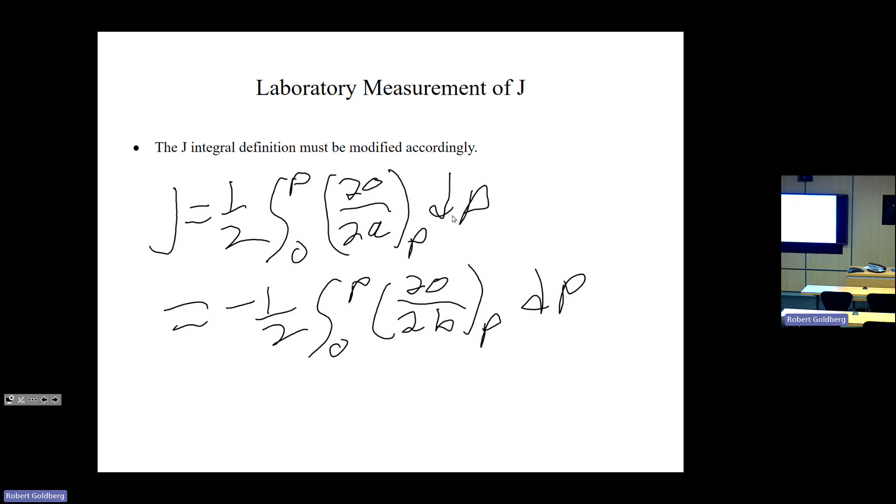And we can make the switch again because of this relationship here. So in order to compute J from this expression, we need to determine the relationship between the load and the displacement and the dimensions of our panel.

We're assuming an isotropic material that obeys the Ramberg-Osgood stress-strain law, the nonlinear elastic law we talked about last week. From dimensional analysis, you can determine that the displacement equals half the distance between your cracks times some function of the load over sigma naught - one of the constants in our Ramberg-Osgood law related to the yield stress - times B, and also a function of the crack length divided by B, and sigma naught divided by the modulus, and Poisson ratio allowing for plane stress, and the other constants in the Ramberg-Osgood law, alpha and n. So this is just some non-dimensional function relating our displacement to all this.

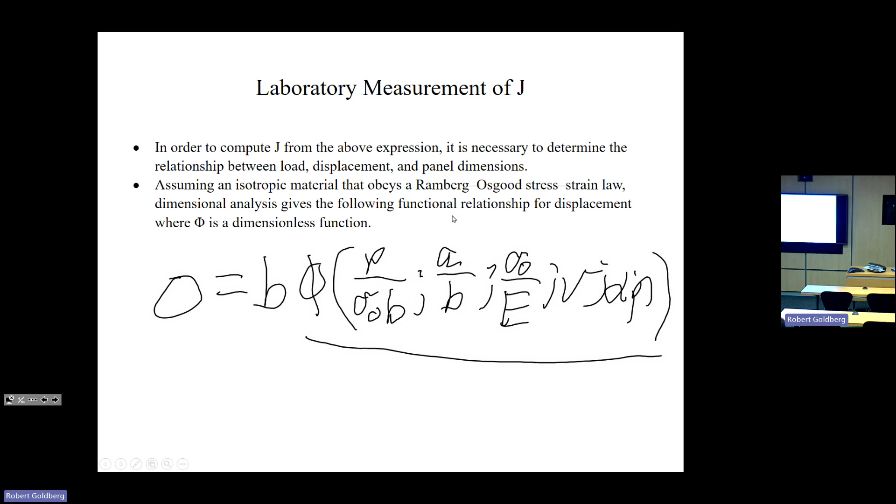Now we'll simplify things a bit: for fixed material properties that don't change with time, we only need to consider the load and specimen dimensions. You can take your displacement and break it up into an elastic component and a plastic component. If we substitute this into our expression, we'll effectively break it up into an elastic component and a plastic component.

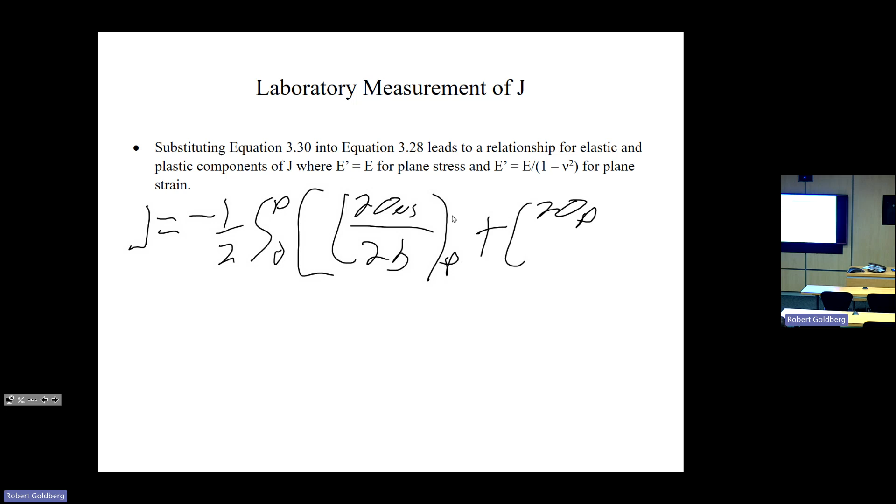Specifically, we can say that J equals -1/2 the integral from 0 to P of the derivative of the elastic part of our displacement with respect to B under load control, plus the derivative of the plastic part of the displacement with respect to B for constant load, all integrated over the load.

This elastic part is easy - we find it's just equal to the square of the stress intensity factor divided by E prime, where for plane stress, E prime is just equal to E. For plane strain, there are also Poisson ratio terms in there. Minus 1/2 the integral from 0 to P of the variation in the plastic part of the displacement with respect to B, integrated over dP.

So we only need to worry about the plastic displacements, because the solution for the elastic component of J is already available - it's the standard stuff from when we discussed linear elastic fracture mechanics. Now we can also assume that all our stresses are concentrated right in this region between the cracks, because of the crack tips.

A reasonable assumption is that the plastic deformation is confined to the ligament between the crack tips. Because of that, we can assume that B, the distance between the cracks, is the only length dimension that influences the plastic part of the displacement, since that's the only place where any notable displacement is going on.

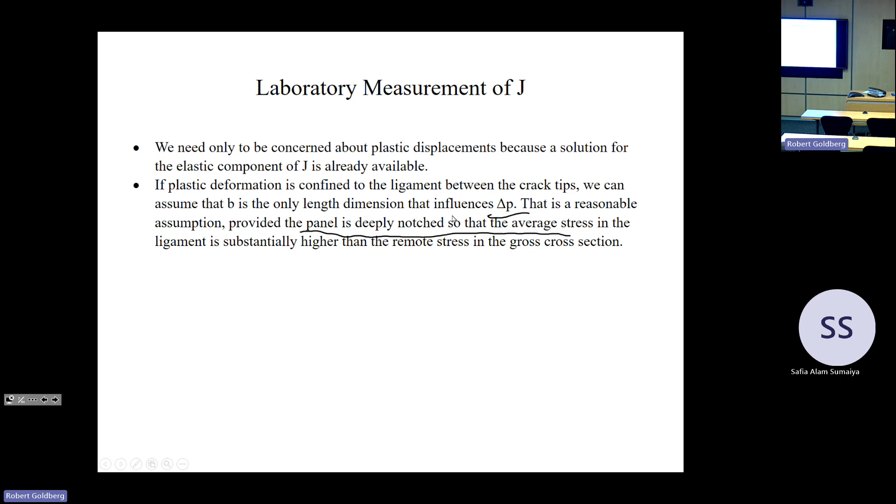So with all that, we're going to define a new function for the plastic displacement. We'll say it's equal to the distance between the cracks times some function of the load divided by this half distance between the cracks.

And we're going to assume, since plasticity is only taking place between the cracks, we don't have to worry about what's going on in the region of the crack length.

So taking a partial derivative with respect to the ligament length B, we take this expression and differentiate it. The derivative of the plastic part of the displacement with respect to B is equal to, by a chain rule type of thing, this function H of P over B, because we differentiate out the B, and then minus H prime of P over B times P over B.

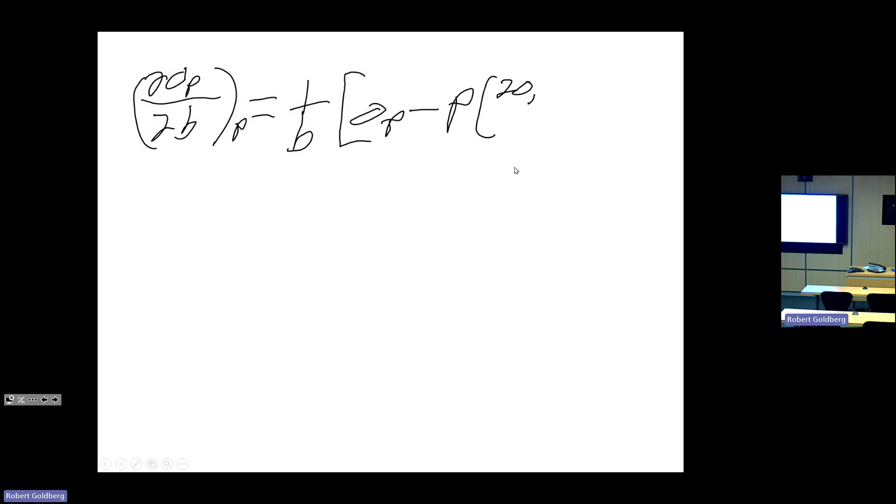And from that, when we take all this and substitute it in what we have here, using this definition that H of P over B is equal to our plastic displacement divided by B, and substitute it in, what we end up with is that the derivative of the plastic part of our displacement with respect to B, for the case of applied load, is equal to 1 over B of the plastic displacement minus P times the derivative of plastic displacement with respect to the load for the case of constant B. And yeah, that's it.

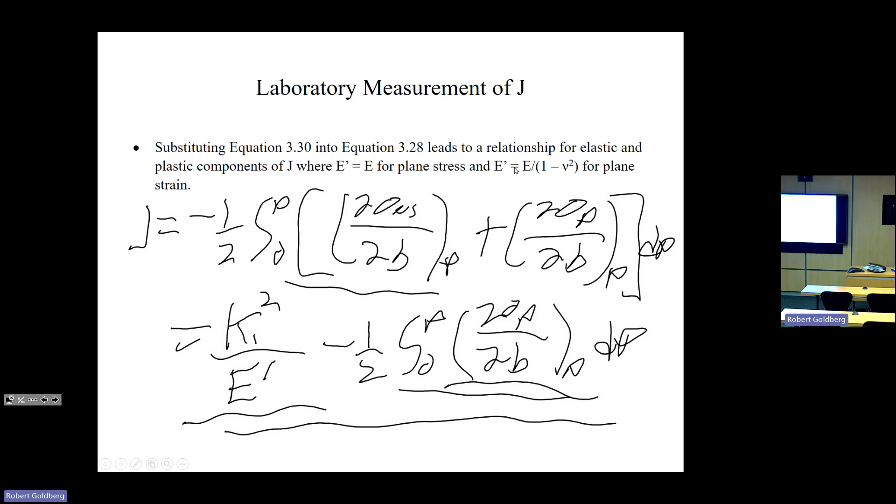Okay, so then we take this and substitute it into... here. So we take all this we found, so we can substitute it in. And what we get after all this, and doing some math, integrating by parts...

What we come up with is that J is equal to the square of the stress intensity factor divided by E prime, plus 1 over 2 times B times 2 times the integral from 0 to the plastic displacement of P times d delta P, minus P times delta P.

And, at least from a theoretical point of view, this is something that we can measure in the laboratory, because if we have our total displacement and we subtract off the elastic displacement, using some of those figures we showed last week to show how you could determine the plastic part, we had a figure where you had your stress strain curve and you could determine your plastic displacement based on your load displacement curve. So you can determine your plastic displacement at any point.

So this is ultimately an equation where, when you're doing an experiment, you measure your distance between the cracks, you measure the current value of the load, your current value of your plastic displacement, you carry out this calculation, and you can determine the value of your J integral in the laboratory. And as I said, in a couple weeks, when we go into details on laboratory testing, we'll go into these ideas in more detail and fill in some of the gaps.

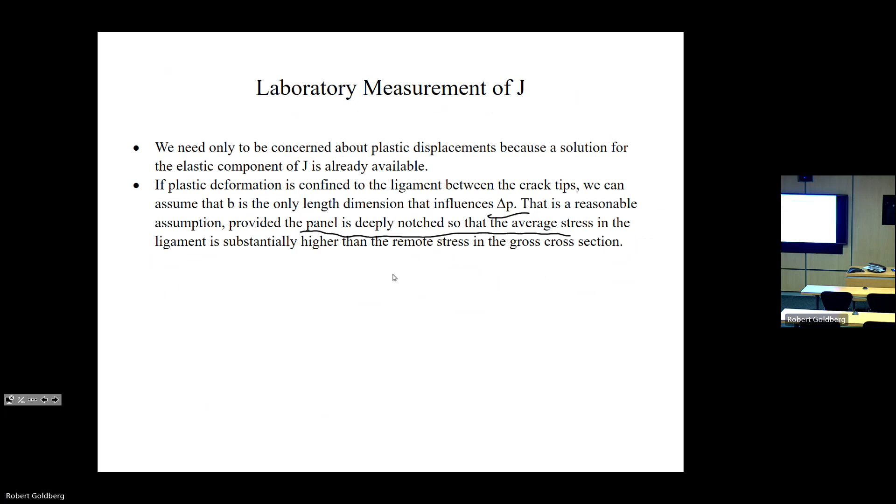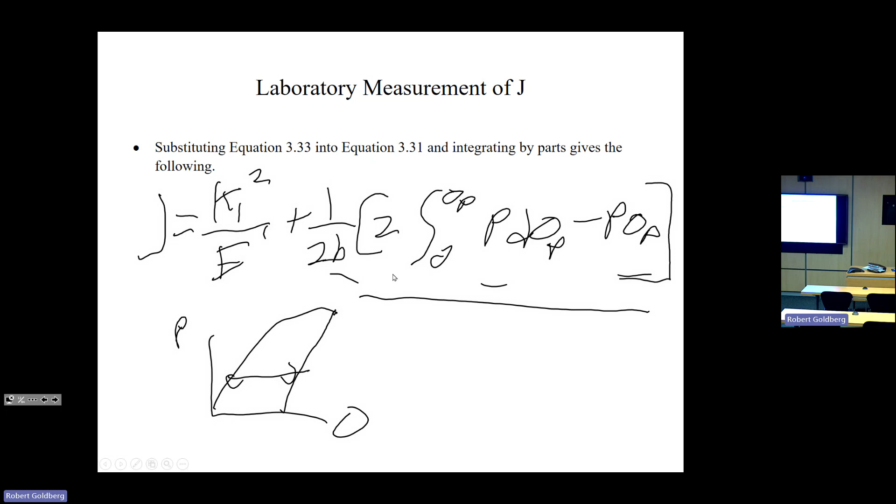But this is just an idea where, for this particular specimen geometry, the double-edged notch tension specimen, it's a way where just by measuring in the laboratory crack lengths, distances between cracks, load, and your load displacement curve, you can experimentally come up with the value of the J integral, okay?

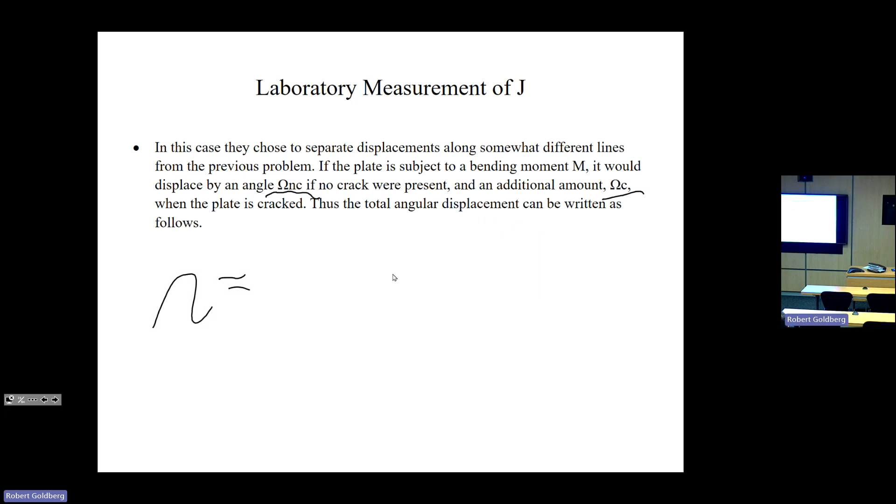So the total angular displacement, omega, defined here, is equal to the non-cracked part of the angle that would occur without any cracking, plus the change in angle due to cracking. Keep in mind, if you have a really deep crack, this change becomes really big compared to the non-cracked part, so the effect of the non-cracked part basically goes away.

So the energy absorbed by the plate is equal to the integral from 0 to the current value of the rotation angle of the moment, integrated over the angle. It's the same way that for a tension test, the strain energy is the area under a force-displacement or stress-strain curve. For this case, under bending, the energy is the area under the moment-angle curve.

So as we talked about before, J is ultimately equal to the derivative of our strain energy with respect to crack area. When we do this for this problem, only omega C, the change in angle due to cracking, contributes to the energy release rate, because omega NC is the change in angle that would take place ordinarily if there wasn't any cracking, and isn't a function of crack size by definition.

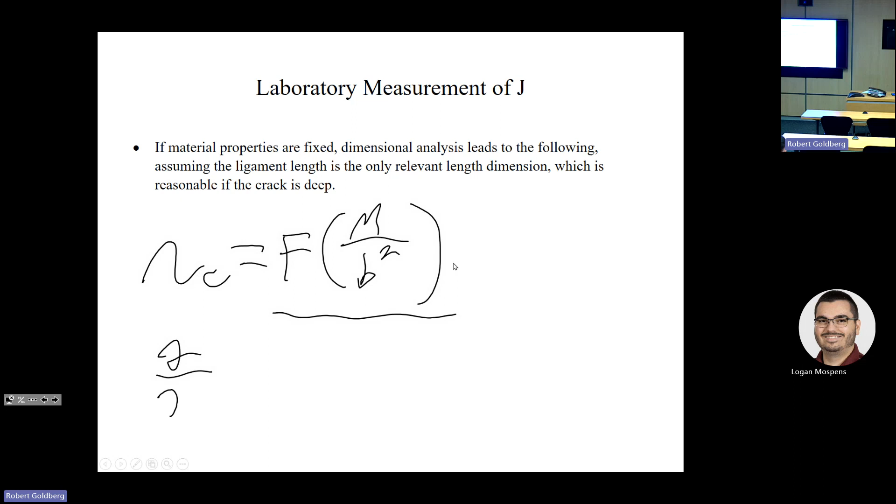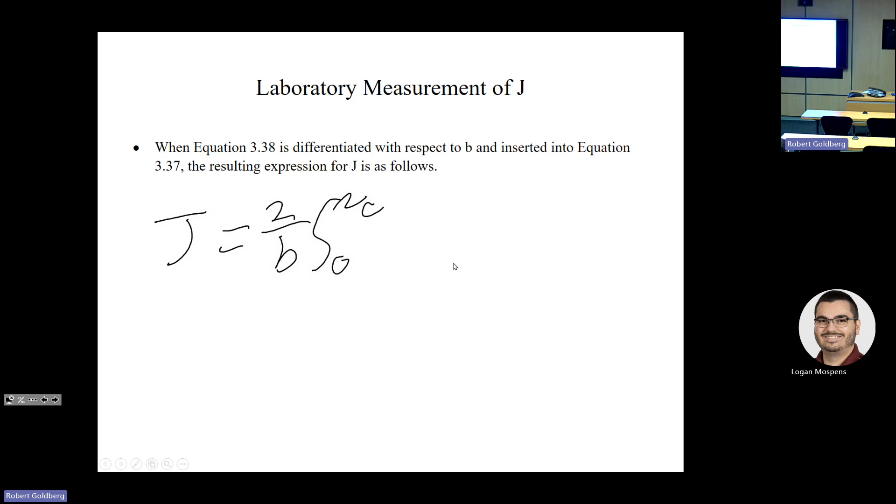So we take this and differentiate it with respect to B, and substitute it in. When we do all that, we end up with J equal to 2 over B times the integral from 0 to omega C of M d omega C.

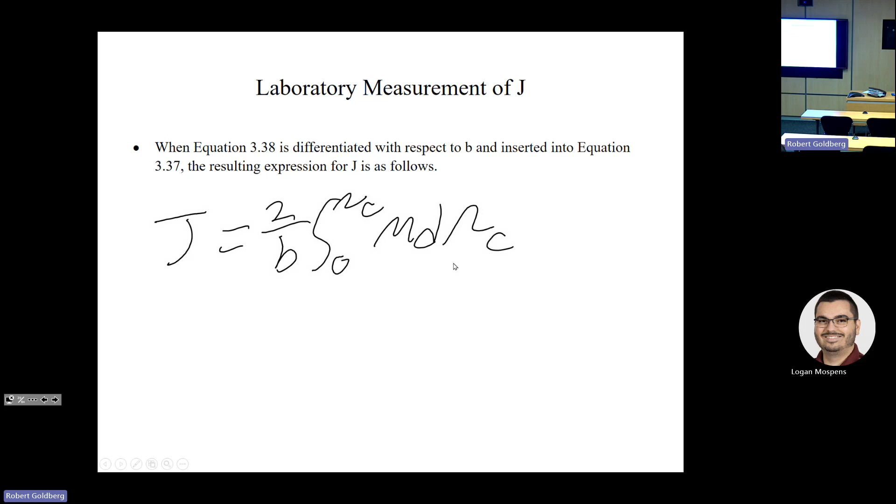Now, you can see a lot of things are falling before, like I said, you'll see in just a few minutes we're going to end up pretty close to where we were before, just formulated a little bit differently, and it'll be more in terms of energy.

Note here, the decision to separate the angle into crack and no crack components was somewhat arbitrary. Could have divided the displacement into elastic and plastic components as we did before. If the crack is relatively deep, this should be entirely elastic. This change in angle may have both elastic and plastic components.

So we can rewrite, and we can say that J is equal to 2 over B times the integral from 0 to the elastic portion of the angle change of the moment, of the elastic portion, plus the integral from 0 to the plastic part of the moment d omega p.

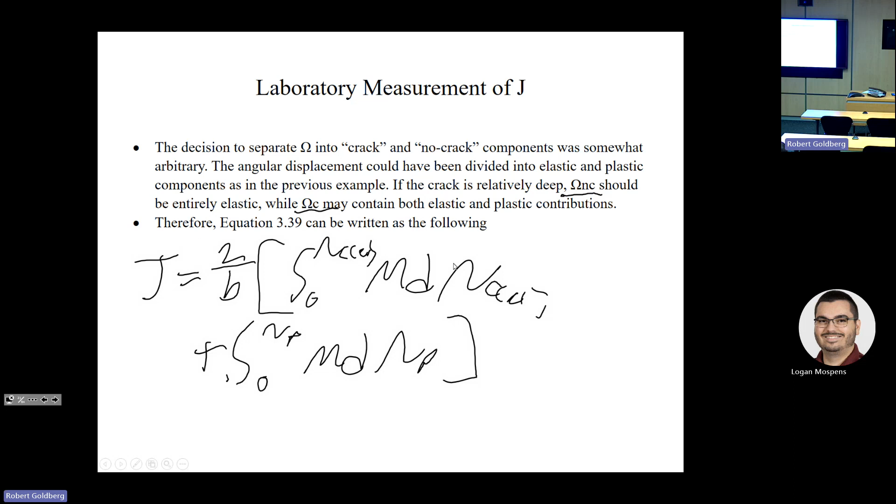And just to note, the prior analysis on the double-edged crack plate in tension could have been written in terms of displacement, if you didn't have any cracks, and added displacement because you have cracks. But we were able to get simpler functions in the previous problem because we were able to assume that the ratio of the crack length to the distance between the cracks didn't matter, and it was a reasonable assumption for our plastic displacements.

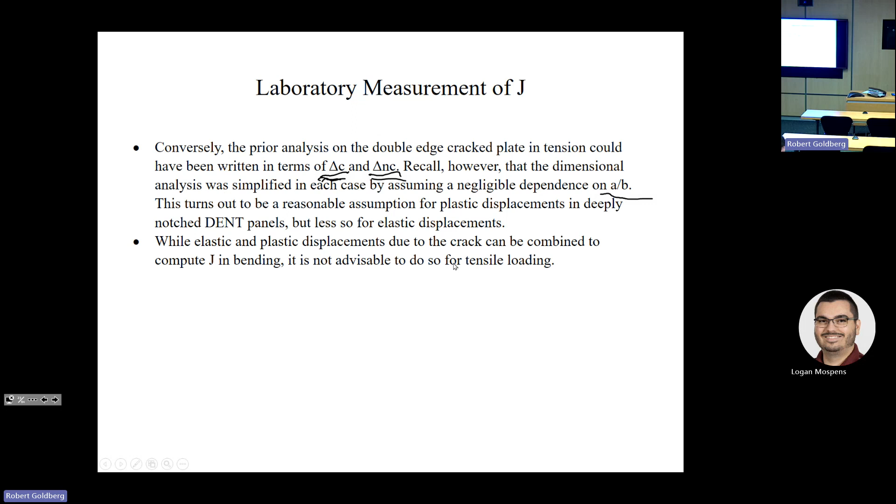So this assumption was good for the problem we looked at, but while trying to do this other idea, if we tried to do this type of idea for the problem we looked at before, it wouldn't be quite as accurate. So you can combine the elastic and plastic displacements for the J integral in bending, but it's not so good to do it in tensile loading.

So the idea that came from this Rice paper is, in general, the J integral for a variety of configurations can be determined to be some dimensionless constant times the strain energy due to cracking, divided by the thickness and whatever dimension you choose for the distance between your crack and something else of interest, whether it's the edge of another crack or the distance between the crack and the end of the plate. And remember, B is equal to thickness, because for all the other problems we looked at, we assumed a unit thickness, but we have to account for the idea that the plates we look at may not just have unit thickness.

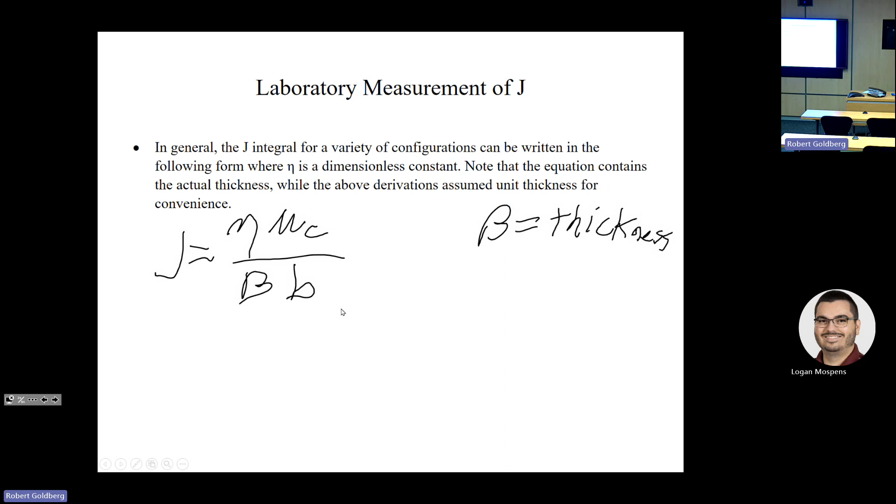So this equation expresses J as the energy absorbed divided by the net cross-sectional area. This is our net cross-sectional area times the dimensionless constant. And for our deeply cracked plate in pure bending, the problem we just looked at, this constant can be set equal to 2, which is why we got the equations we did.

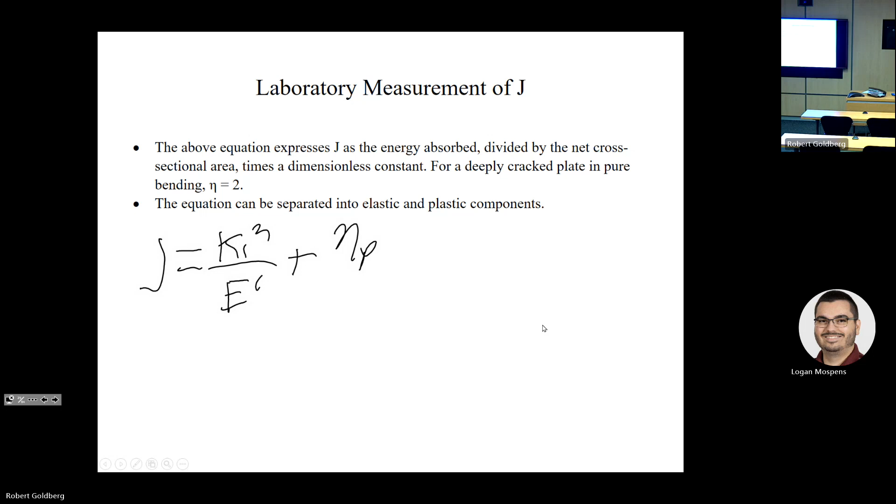And we can take this equation we just had and break it up, in general, into elastic and plastic components. So J is equal to K1 squared divided by E prime, plus this constant times the strain energy due to the plastic part of the strain energy, divided by the thickness and the B dimension.

So it's all this idea leading into the fact that if you separate out the elastic and plastic parts of things, which for some types of tests is easier than others, this is a way that from the laboratory you can take load displacement. The whole idea of all of this is that you can take load displacement curves from tests on various types of specimens. We're going to go into more detail on this when we cover more specific types of tests, but you can take load displacement curves, which is the common type of measurement in a fracture test.

And from these you can compute the J integral to define the elastic plastic response. So even though some of these derivations were a little hairy, the big picture is that you can go from load displacement curves to determining the J integral. So the J integral is something that you can determine in a laboratory.

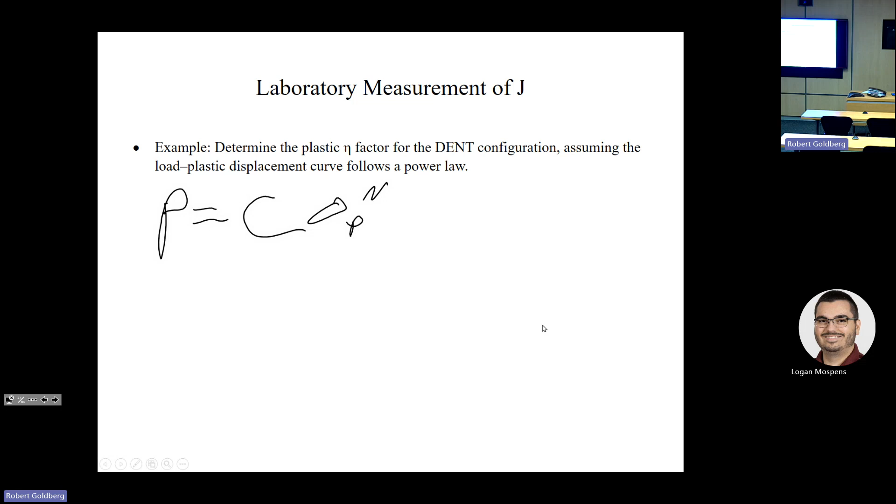Just as a sample, going back to that double-edged notch tension problem we had before, let's say our load is defined by a power law relation, a constant C times the plastic displacement to the n power. Given all that, we're going to take this general expression and ultimately end up with a term for this non-dimensional constant.

So the way we do that is we say our plastic strain energy is equal to the integral from 0 to the displacement of C times the plastic displacement to the n power, times the differential. We do that integral, and it's just equal to C delta P to the n plus 1, divided by n plus 1. By applying this definition, we can show it's equal to the load times the plastic displacement, over n plus 1.

So we can take this and manipulate it, going back to the equation we developed when we looked at the double-edged notch tension problem originally. We said that J was equal to K1 squared divided by E prime, plus 1 over 2B times 2 times the integral from 0 to delta P of P d delta P, minus P delta P.

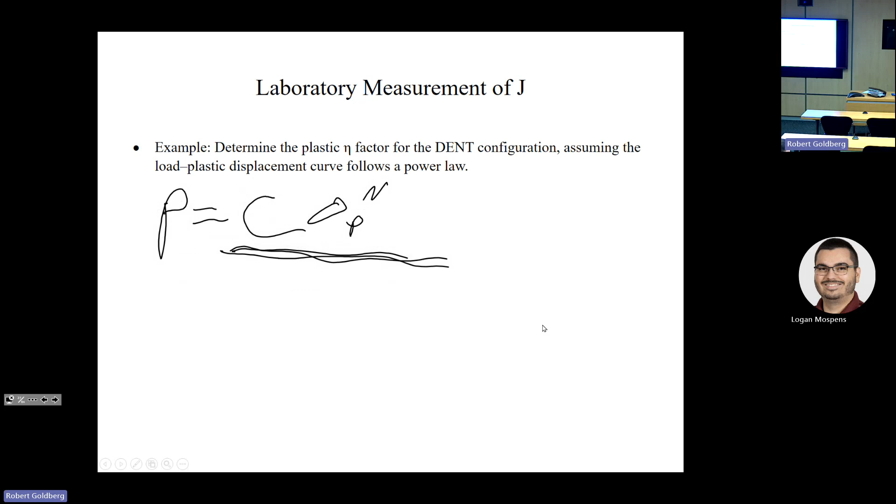So if we take this and set it equal to this, apply this definition for how we define P, we plug it into this integral, do the integral and the algebra, then compare it to this and set it equal to that.

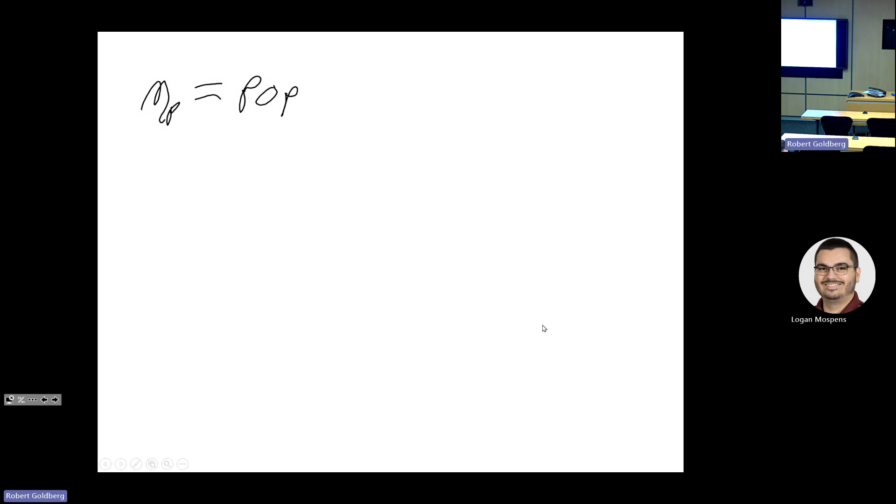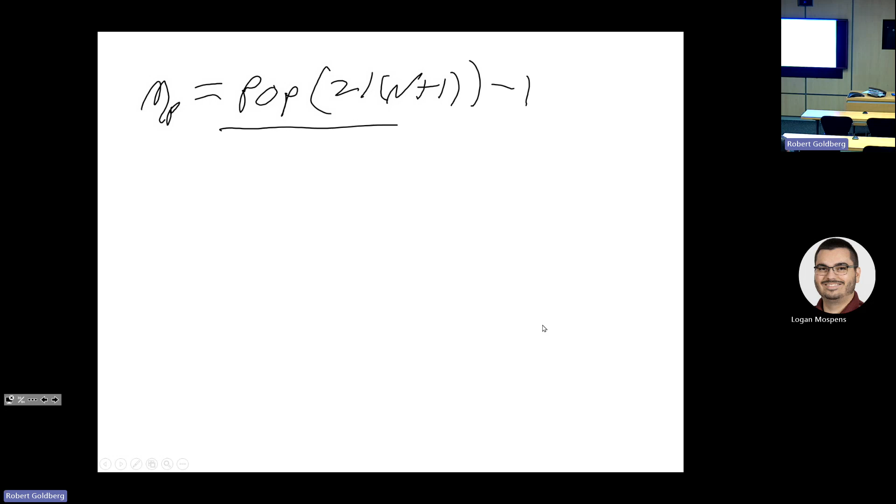So after some integration and algebra, you end up with this parameter equal to P times delta P times 2 divided by n plus 1, minus 1 over P delta P divided by n plus 1. And by canceling lots of things, it's just 1 minus n.

So you defined a relation between your load and displacement. For the simple power law, this non-dimensional constant, which you can plug into this relationship, is very easy. So if you can fit your load displacement data to a power law relation, you can compute your strain energy as you go along using ideas we've talked about, and plug this in. You can take your laboratory load displacement test

and measure the value of your J integral. As I said, it's just the math, and some of this can get a little hairy.

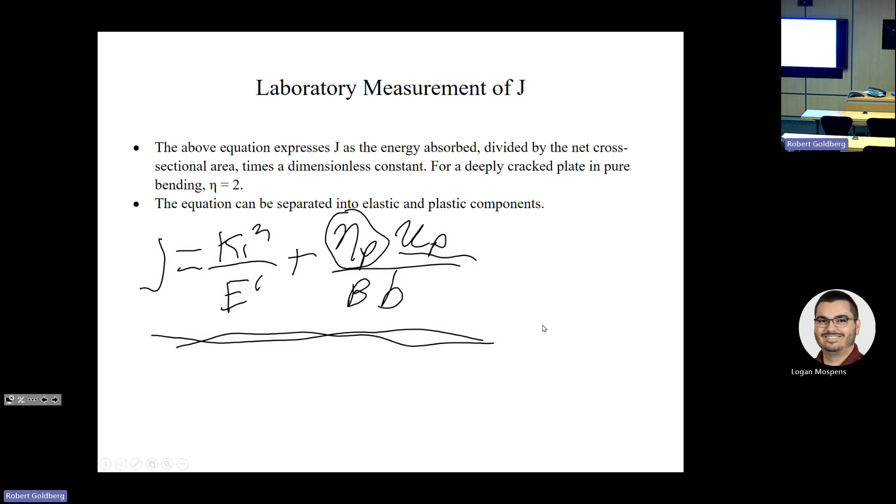But just to emphasize one more time, the big picture is: you have a specimen, you define crack geometries, you take relevant dimensions, you take a load displacement test, you partition out the elastic and plastic parts from your load displacement test, and you manipulate them, and you can determine the value of the J integral from a standard mechanical test that's reasonable to do in the laboratory.

So now we've talked about this J integral. Last week we talked about the crack tip opening displacement, and the relation between the stress intensity and the strain energy release rate before. Now we're going to talk about relationships between the J integral and the crack tip opening displacement.

So for linear elastic conditions, where linear elastic fracture mechanics was still applicable, we talked about the relationship between crack tip opening displacement and the strain energy release rate. And since for linear elastic conditions the J integral equals the strain energy release rate, these equations also describe the relationship between the crack tip opening displacement and the value of J in the case of small scale yielding, where the assumptions of linear elastic fracture mechanics are still at least somewhat applicable.

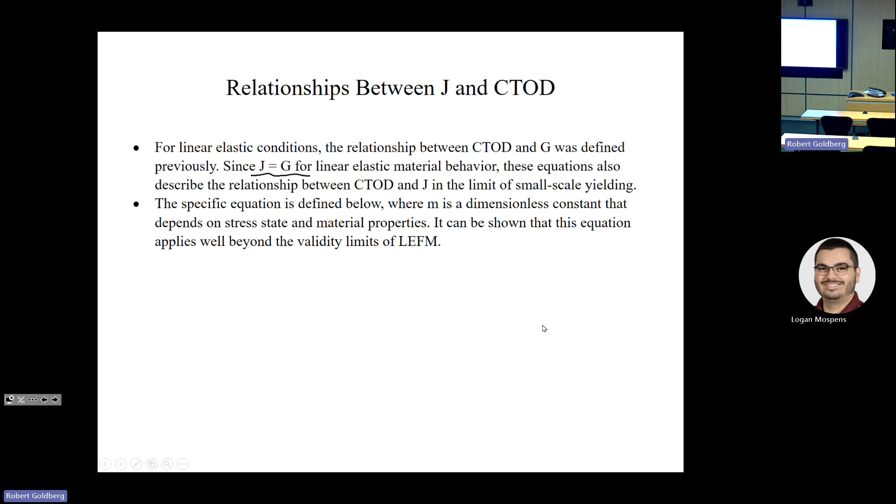So we can say that J is equal to our dimensionless constant, which varies depending on whether you're in plane stress, plane strain, or something in between, times the yield stress, multiplied by your crack tip opening displacement. So this is a simple version of the relationship, which is particularly applicable for small scale yielding.

So if you have just a little bit of yielding, versus now what we have is more yielding. So we want to see, this relationship is fine for the case where we just have small scale yielding. What if you have more yielding?

The approach we're going to take is we're going to look at that strip yield zone idea as a way of determining the crack tip opening displacement. We're going to look at the strip yield zone as we have here. Remember from before, when we defined this, we applied these artificial tractions along the crack tip that are serving to close the crack. That was the basic concept behind the strip yield zone.

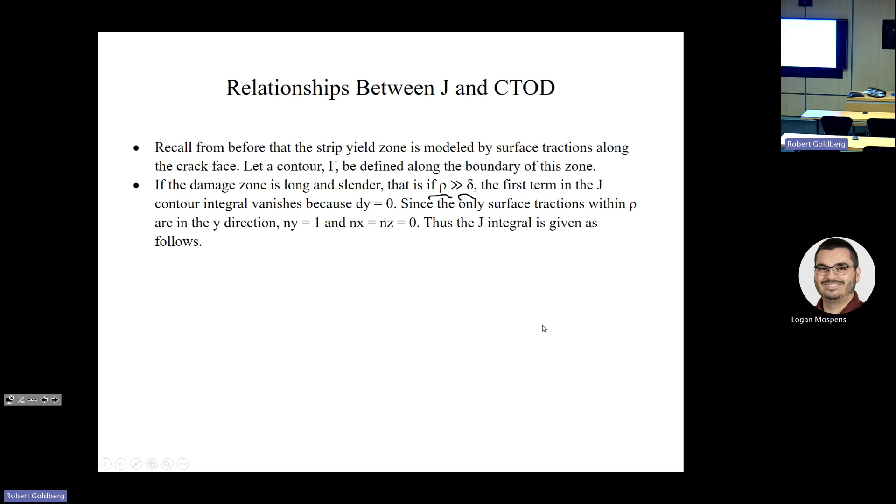So with all that, we can go back to our fundamental definition of the J integral, and say that it's the integral over our contour of our y stresses, because that's what's serving to close it, and the derivative of our y displacement with respect to x, times our increment along the contour. And again, we're assuming our stresses are also just vertical because it's a long and narrow damage zone.

So then the other thing we're going to do is define an alternative coordinate system. We're going to assume that the origin of this alternative coordinate system is at the tip of the strip yield zone, and this x is equal to our rho minus x.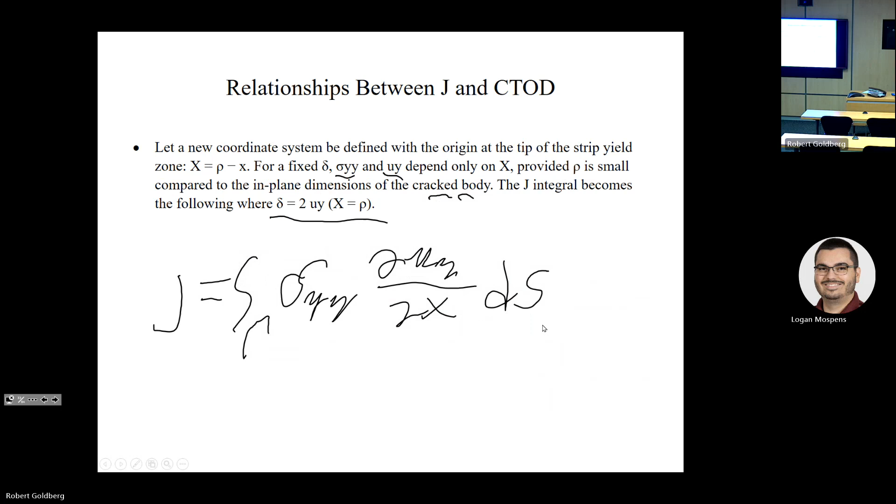So with all these assumptions, what we end up with is that our J integral is equal to 2 times the integral from 0 to rho of our stress as a function of x, times du_y, which is also a function of this big X, with respect to x, integrated over dx.

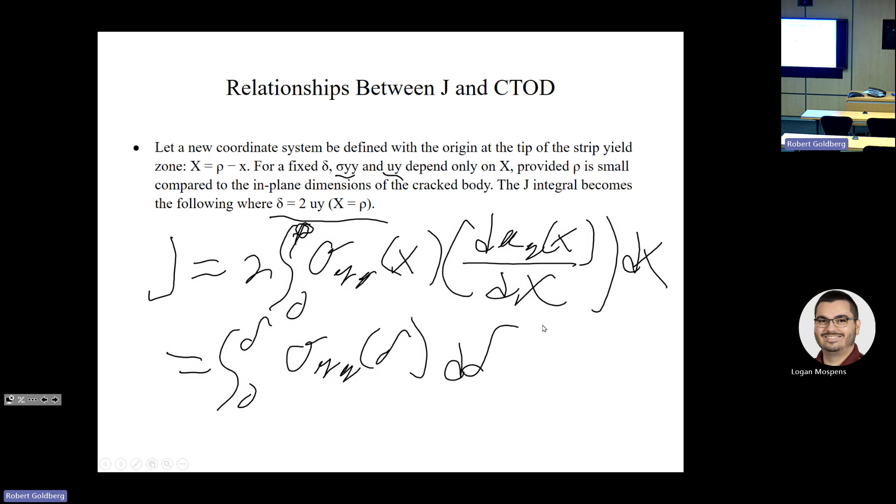What we end up with is our integral from 0 to delta of the y direction stresses, which are a function of delta, integrated over d delta. And since in the strip yield model we assume that within the plastic zone our stress is equal to the yield stress, we can just say that J is equal to the yield stress times the crack tip opening displacement.

This equation is real similar to our original definition of the crack tip opening displacement. We originally came up with it by taking a series expansion in the strip yield model, and we neglected the higher order terms. But we didn't need any assumptions for this new equation. So the strip yield model, which assumes plane stress conditions and a perfectly plastic material, predicts that M is equal to 1 under plane stress for both linear elastic and elastic plastic conditions.

A researcher called Shih goes into details on this in the book. I thought the math was just too hairy to go over here. He provided further evidence that a unique relationship between the J integral and the crack tip opening displacement applies well beyond the validity limits of linear elastic fracture mechanics. He evaluated the displacements at the crack tip implied by the HRR solution we talked about last week, related the displacements at the crack tip to J and the flow properties, and obtained an expression similar to the expression shown above.

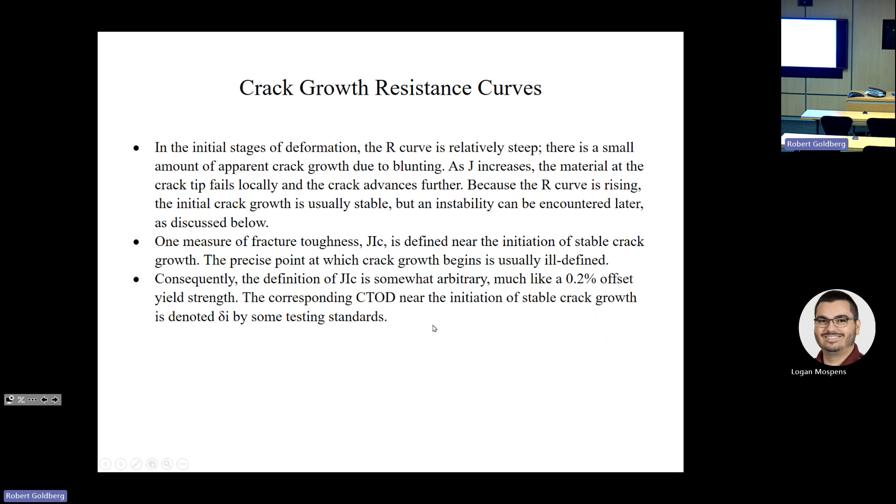So for the J resistance curves, the slope is usually quantified by this term called the tearing modulus, and it's non-dimensional. So this tearing modulus is equal to the modulus divided by sigma naught, usually the yield stress squared, times the current value of our slope of the JR versus crack length curve. And this subscript R indicates the value of J on the resistance curve.

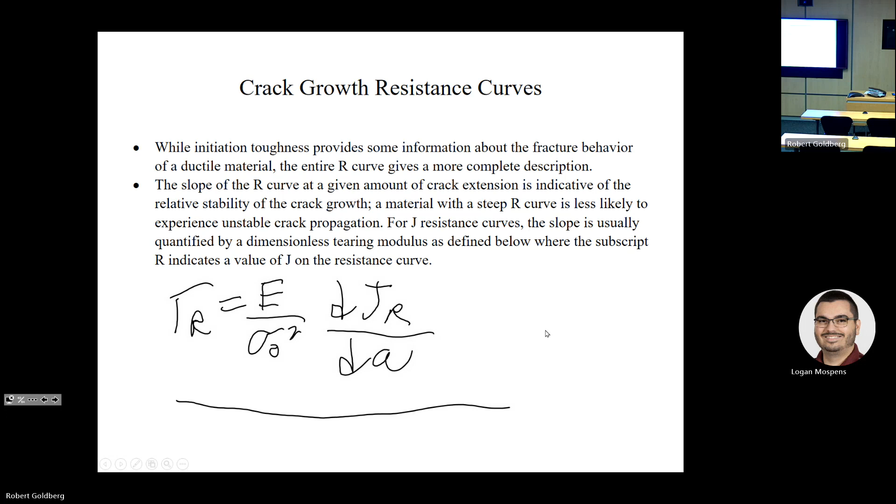So this is a new parameter that will lead us to quantify the behavior of our R curve for elastic plastic analysis. Plus, it'll give us a way to define the stability, as we'll start talking about now.

So the conditions that govern the stability of crack growth in elastic plastic materials are basically identical to the elastic case we talked about before. Instability occurs where the driving force is tangent to the R curve. So we have our R curve and we have our driving force curves. We talked about all this before for the elastic case, and just like before, when they're tangent, this is where you start getting instability.

And also, like we talked about before, load control is usually less stable than displacement control, because it's at this point here in the load control curves where we get instability. So all this, it's just that the curves are a little more nonlinear, but the ideas are the same as we talked about before when we talked about linear elastic fracture mechanics. And the conditions in most structures are somewhere between the extremes of load control and displacement control.

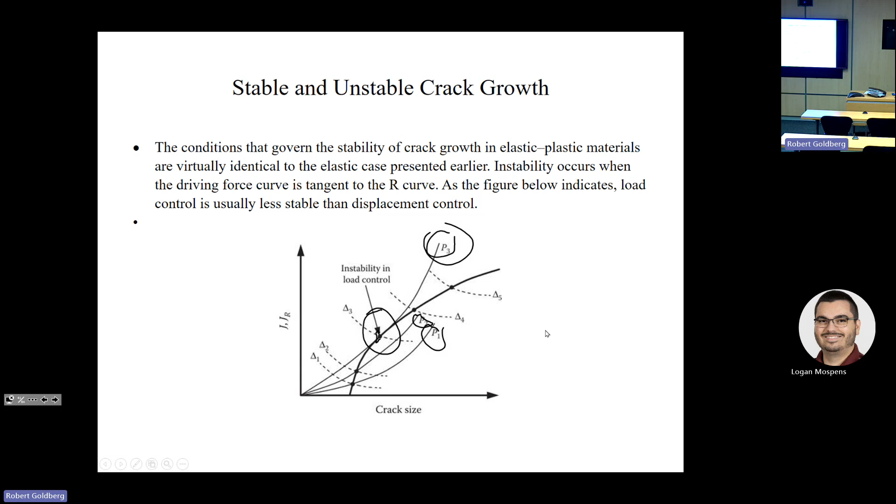Since the R curve slope we represent by the dimensionless tearing modulus, we can express our driving force, the P here, in terms of the applied tearing modulus, and we can say that our applied tearing modulus is equal to our modulus divided by our yield stress squared times our slope of our J crack length curve for a specified displacement. And this delta T here is a total remote displacement that we can define as follows.

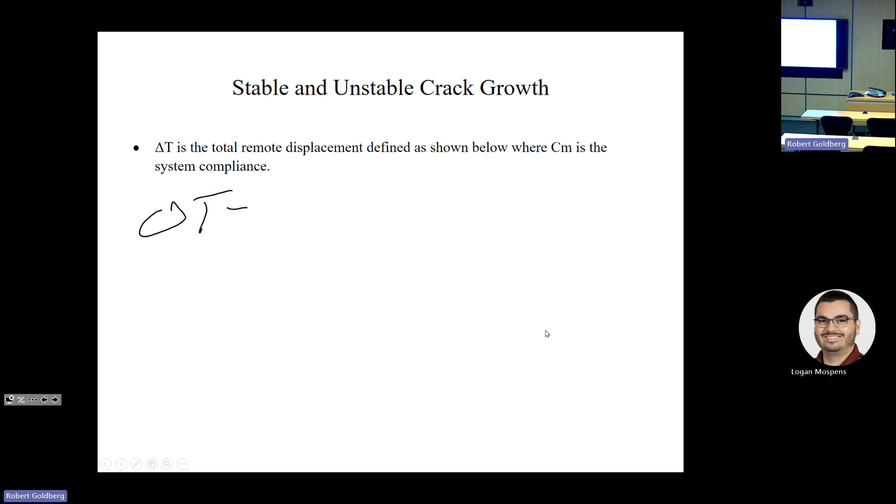So our total displacement is equal to our displacement plus the system compliance times the load. So this defines our total remote displacement. So we have the displacement, our far field displacement, plus the extra terms in the displacement due to the fact that we have a crack there. We use that as our displacement. We evaluate our dJ/dA curve at that point, and that gives us our applied tearing modulus, which defines our resistance curve and our stability.

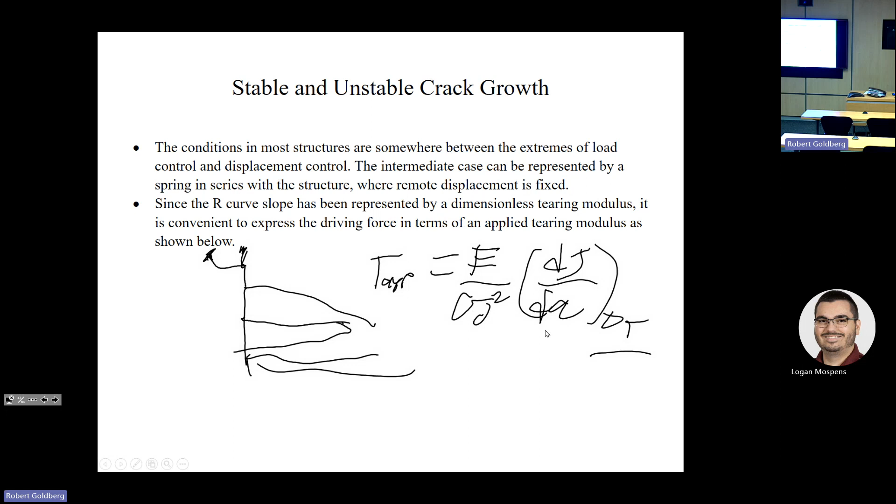And the slope of the driving force curve for a fixed delta T is just like we did for the linear elastic case, only instead of G, we use J. So we can say, and this is the same equation that we had before.

So dJ/dA at delta T is equal to the derivative of J with respect to A holding the load constant, minus the derivative of J with respect to... We're going to do an example in a minute where we compute some of these derivatives. We'll give a specified relation and compute some of these derivatives. So it's minus dJ/dP for specified A, multiplied by d-delta/dA for specified P, all of that multiplied by our system compliance plus the derivative of our displacement with respect to load for specified crack length, and we invert this.

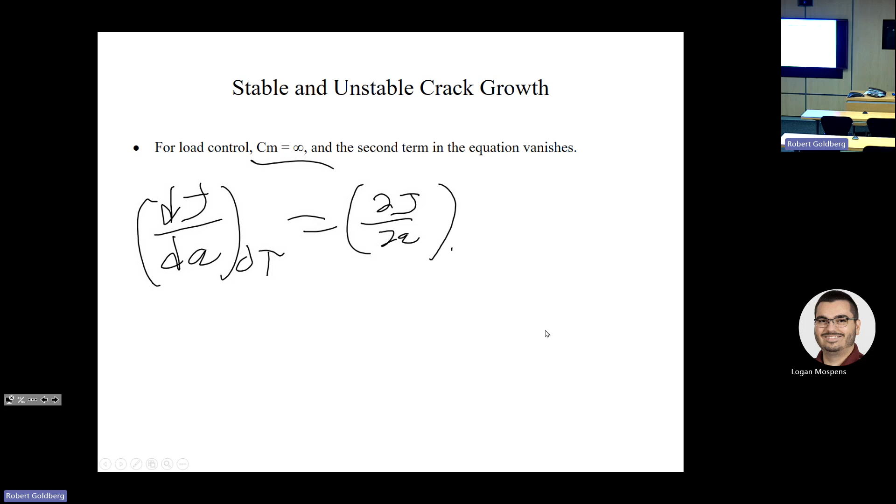Now for load control, this CM term, the system compliance, goes to infinity. So if this is infinity, that takes this thing to infinity. You invert infinity, it's undefined, so that makes all of this go away. So for the case of load control, it's very easy in that the derivative of J with respect to A for this total remote displacement is equal to the derivative of J with respect to the crack length at the value of our load.

And conversely, for displacement control, the Cm goes to 0, and as makes sense, this total remote displacement is just equal to our applied displacement, which makes sense because if we're applying the displacement, then that's our baseline for which everything is based on.

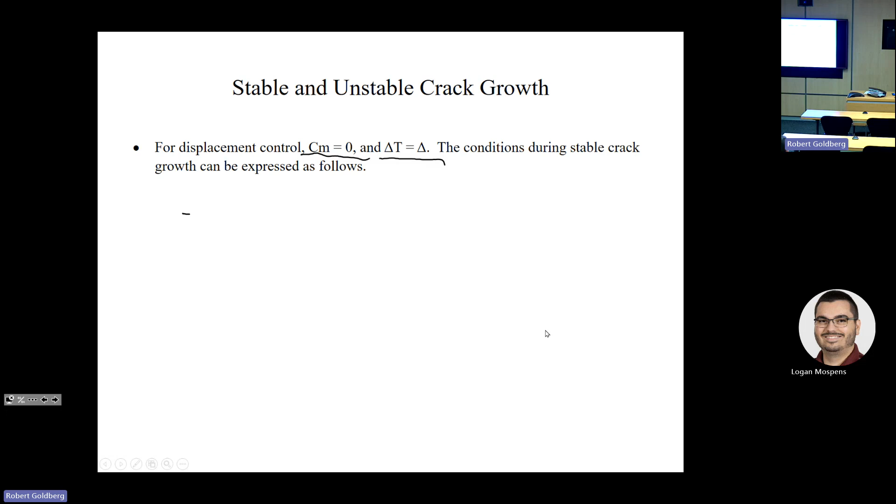So during stable crack growth, we can say that our value of J has to be equal to JR, and that our applied tearing modulus is less than or equal to the TR term that we described before.

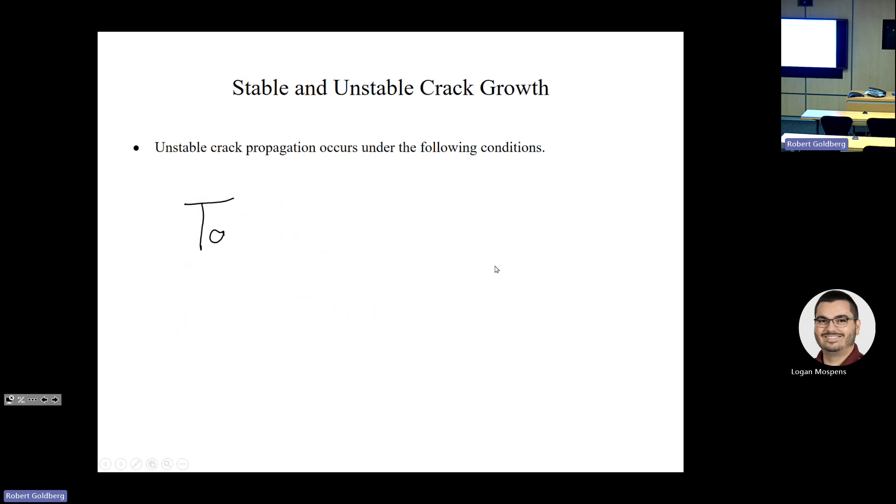So a simple example of how to apply this process is shown here. Unstable crack propagation takes place where our applied tearing modulus is greater than the TR term we described. We have a double cantilever beam specimen with the spring in series, and we assume overall linear elastic conditions.

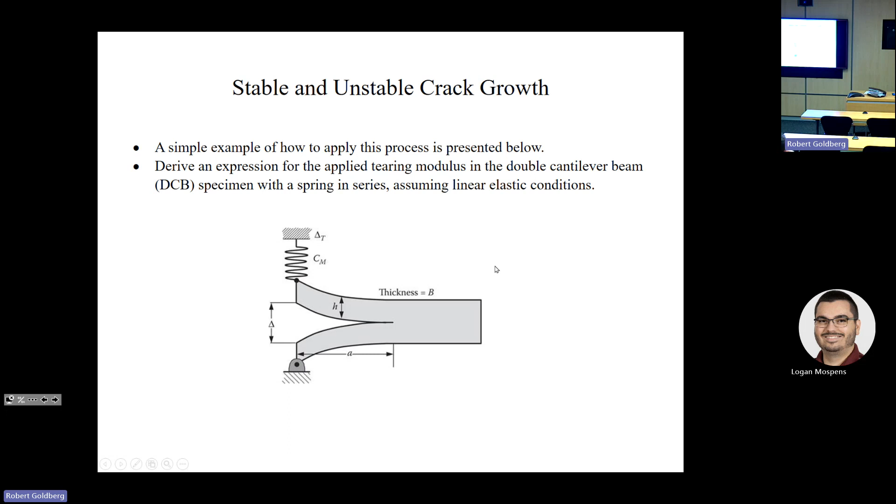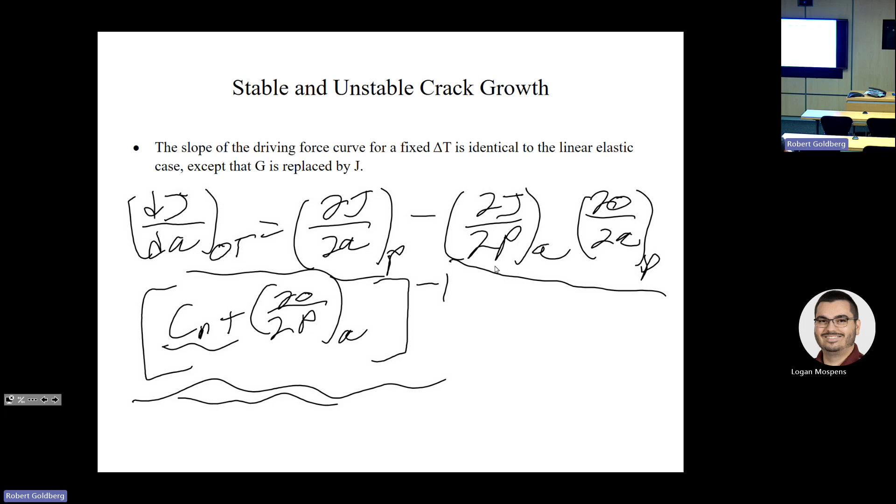From an example we did before, we found that J, the strain energy release rate, was equal to P squared times A squared divided by the thickness times the modulus times the moment of inertia. And our displacement was equal to 2PA cubed divided by 3EI. So given all that, we go to this equation here that had all of these partial derivatives.

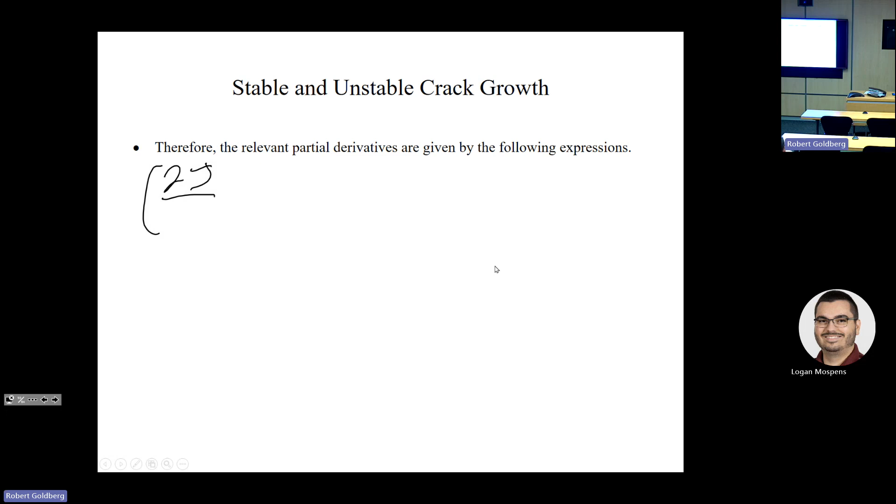We now have specified relations for our J and our displacement. So we can say that the derivative of J with respect to A is equal to 2P squared A divided by BEI, and the derivative of J with respect to P, holding A constant, is equal to 2PA squared over BEI. The derivative of delta with respect to A is equal to 2PA squared over EI, and the derivative of delta with respect to P, holding A constant, is equal to 2A cubed over 3EI. So we take all of this and plug it into our equations.

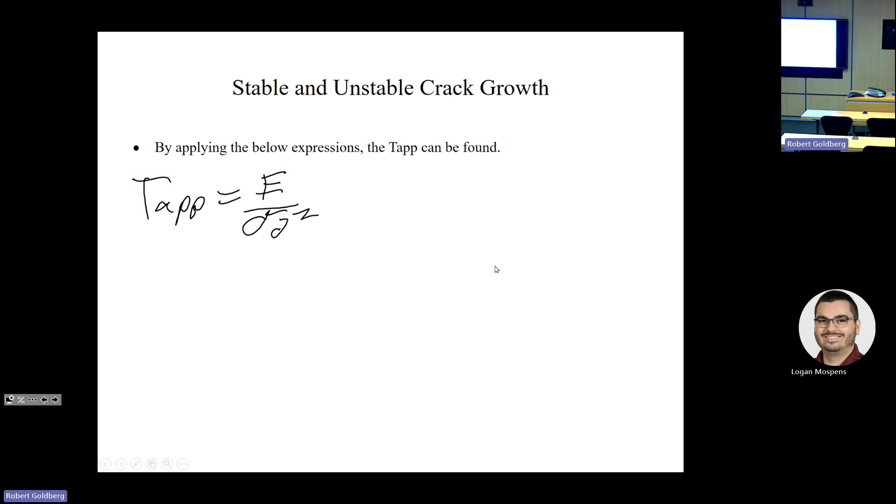We know that our applied tearing modulus is equal to E over sigma naught squared times dJ/dA at the value of delta t. And we know that dJ/dA at delta t is equal to dJ/dA at P minus dJ/dP at A times d(delta)/dA at P, all multiplied by Cm plus the derivative of delta with respect to P, inverted. So this is the equation we defined before.

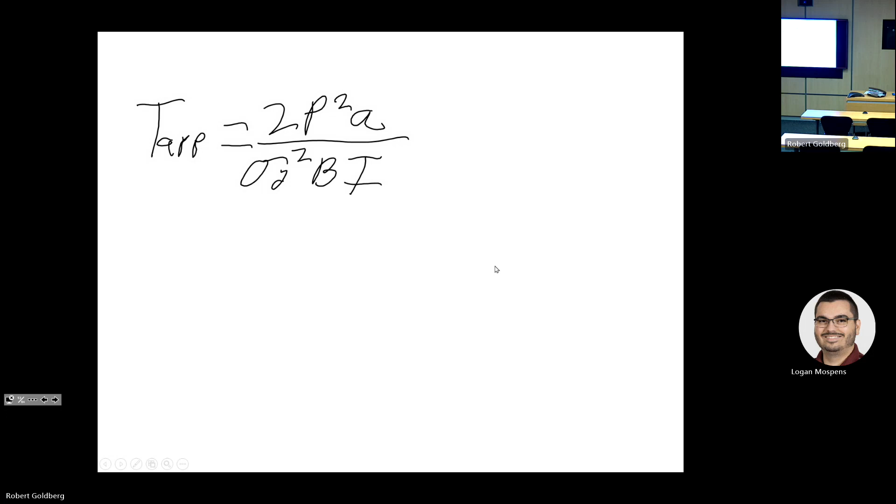We take all of these derivatives, plug them in here, do some algebra, and end up with our applied tearing modulus equal to 2 times P squared times A divided by sigma naught squared BI, times 1 minus 2A cubed divided by EI, all multiplied by Cm plus 2A cubed over 3EI, inverted and negated. So we have a defined geometry, and from that geometry we defined our J integral and our displacement, and from all that we were able to compute our tearing modulus.

So just a couple other points on this. As discussed earlier, the point of instability in a material with a rising R curve depends on the size and geometry of the crack structure. The critical value of J at instability is not a material property if J increases with crack growth. It's usually assumed that the R curve, including the J1C value, is a material property independent of configuration. This is a reasonable assumption, but keep in mind that if the variability of J changes with crack growth, the assumption may not be so valid. So it's something to be careful about—always make sure your actual condition fits the idealized conditions under which certain situations were set.

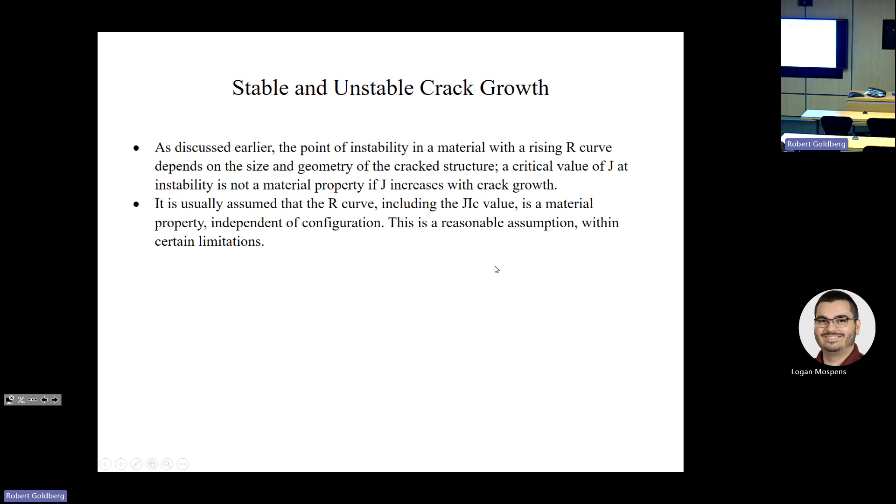Now, a couple other points: computing J for a growing crack. The geometry dependence of a J resistance curve is influenced by the way in which J is calculated. All the equations we derived earlier were based on the energy release rate type of definition of J, and thus are valid only for a stationary crack. There are ways to compute J for a growing crack, including the deformation J and the far field J, which we'll describe qualitatively below. The former method, the deformation J, is what's usually used to obtain experimental J resistance curves.

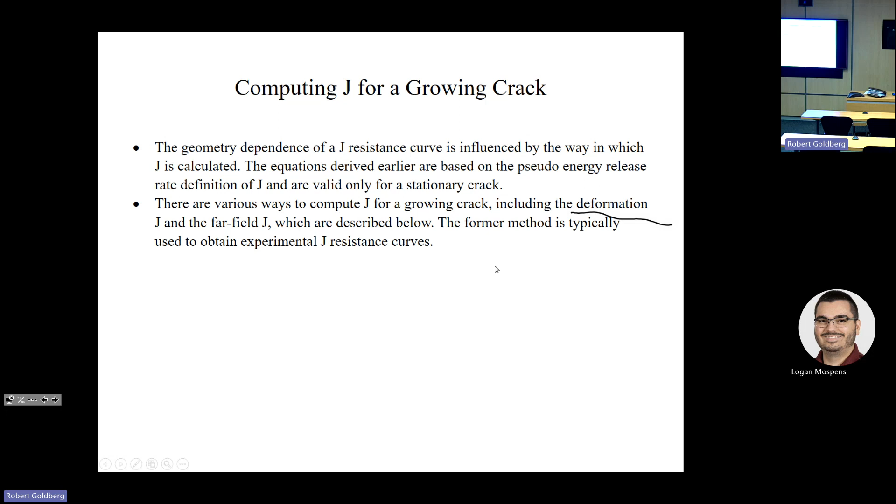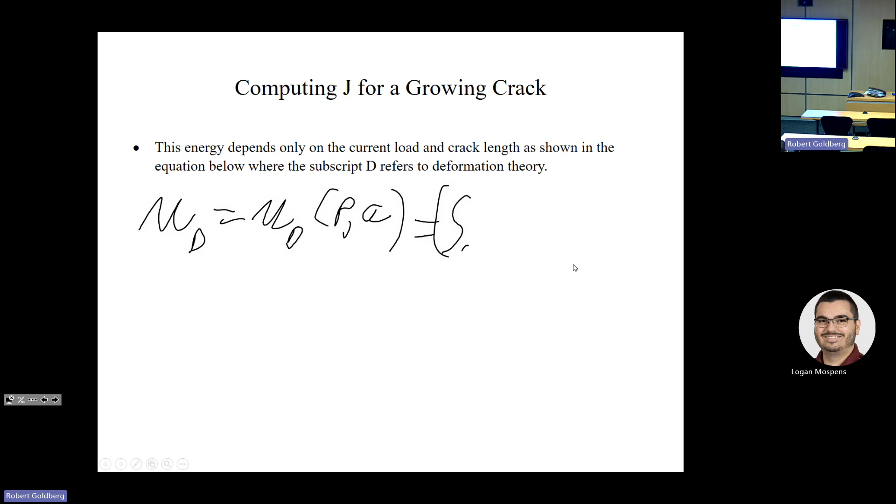This energy depends only on the current load and crack length. So we're going to define this U sub D, this strain energy, as equal to, and it's only a function of the current load and the current crack length, which is equal to the integral from 0 to our current displacement of our load displacement curve, assuming that the crack length is at the point where it's equal to our specified A1.

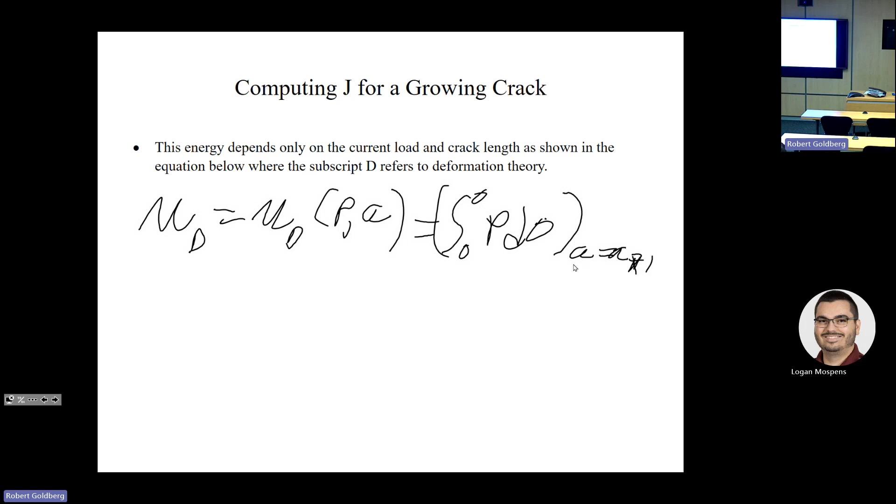The J integral for a nonlinear elastic body with a growing crack is defined by this equation. So J for this case is equal to negative 1 over B times the derivative of this U sub D strain energy with respect to the crack length, for our displacement, which is equal to this non-dimensional term eta times the strain energy U D divided by the thickness, our B dimension.

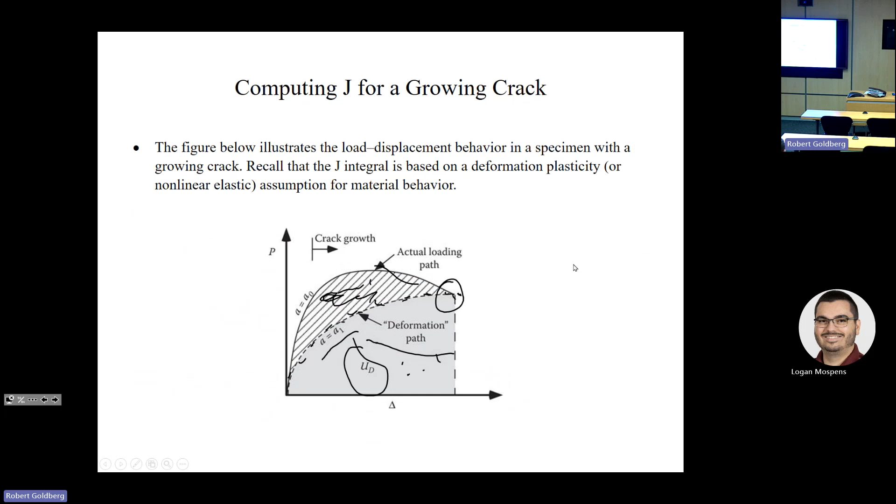It's similar to before, only this is different because we have our growing crack, where before we assumed that our crack was stationary. So when the J integral for an elastic plastic material is defined by the above equations, the history dependence is removed and the strain energy release rate interpretation of J is restored, because we're accounting for the special case. We're saying, what if it behaved as if it's a nonlinear elastic material, and we know our crack is here, so we're assuming everything just progressed along as if it was a nonlinear elastic material, unlike the real loading case where our crack actually grew from A0 to A1.

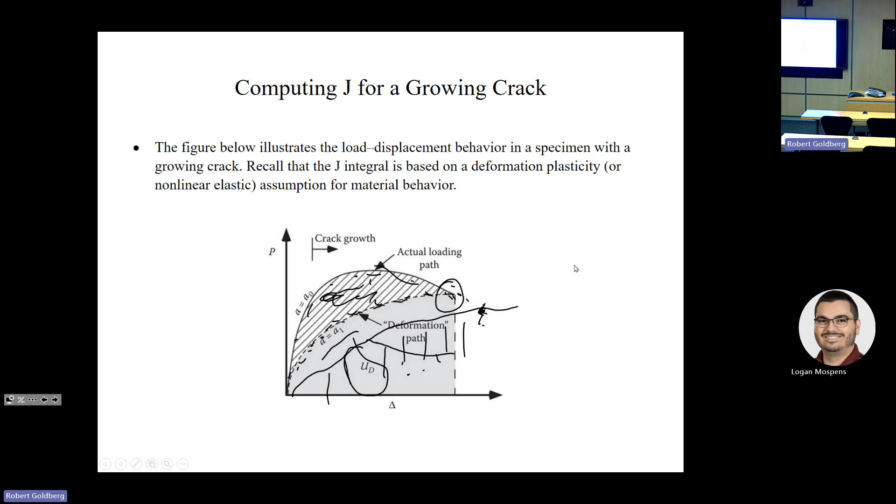Because if we had this here, and the crack changed again, we'd have a new equivalent load displacement curve. So we'd have a new area under that equivalent load displacement curve, and thus a new strain energy.

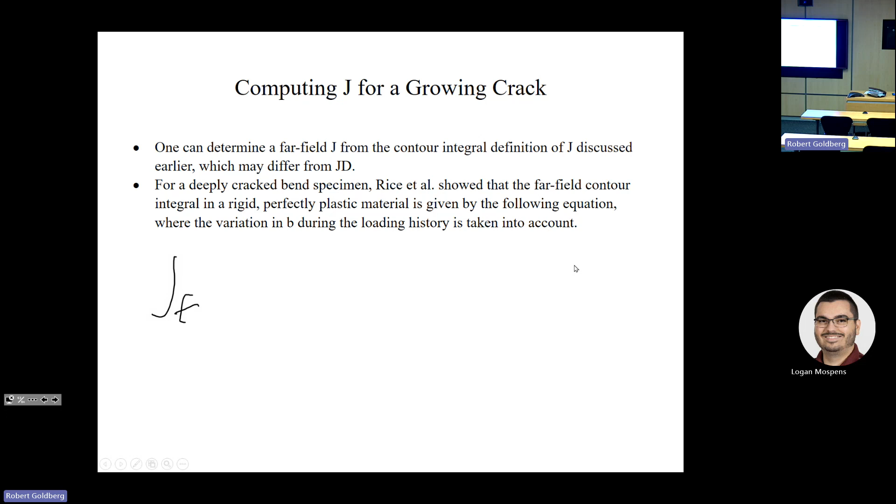You can also determine a far field J from the contour integral definition, which may differ from JD. Rice et al. showed for a deeply cracked bend specimen, the far field contour integral in a rigid, perfectly plastic material can be defined as an alternate J, equal to 0.73 times sigma naught times the integral of 0 to omega of b d omega.

For that crack bend specimen, you can use alternate definitions even for a growing crack to compute an alternate definition of J. Using the idea of deformation theory, you get that JD is equal to 0.73 sigma 0 times b times the crack angle.

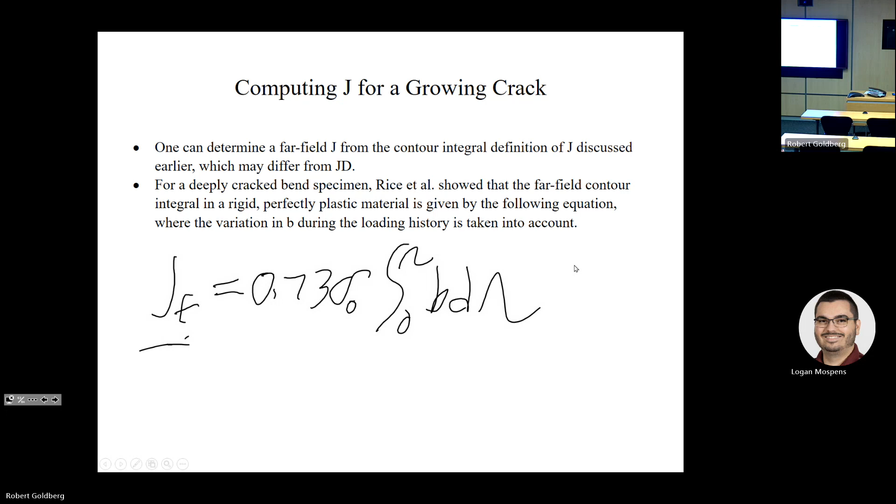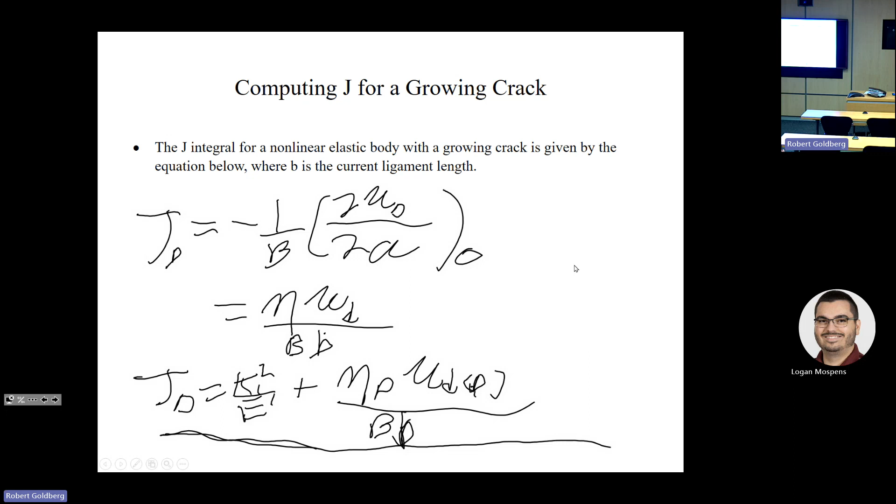The two expressions are identical when the crack is stationary. People have done finite element calculations, and for a 3-point bend specimen with a strain hardening material, if the crack growth is only moderate, this expression is equal to this one, and similar to this other one. So for a moderate amount of crack growth, these alternate methods all pretty much give the same results, which is good.

The J integral from the contour integration is path dependent when the crack is growing in an elastic plastic material, and it tends to zero as the contour shrinks to the crack tip. There's no guarantee that either of these methods will uniquely characterize the crack tip conditions for a growing crack.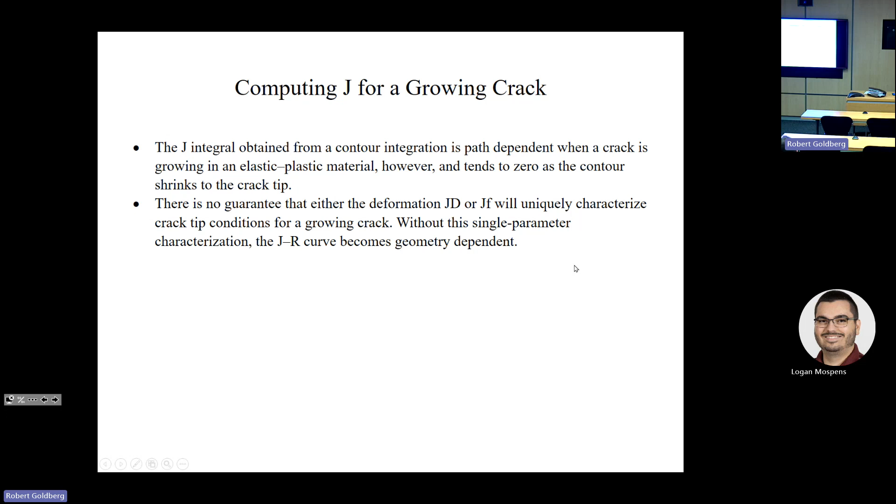If you have a situation where they don't uniquely characterize the crack tip conditions, the JR curve becomes geometry dependent, which makes it not viable for use as a material property. But for cases where the crack growth is moderate, the assumptions are reasonable and everything works out okay. It's once again a case where we assume idealized conditions, and you always have to be cognizant that if you're outside the norms for which your idealized methods were developed, things may not fit within the parameters given by the idealized derivations.

We talked about K-controlled fracture before. Now we're going to talk about J-controlled fracture. This term corresponds to situations where all the assumptions do work and J completely characterizes the crack tip conditions. In this case, there's a unique relationship between J and the crack tip opening displacement. J-controlled fracture implies CTOD controlled fracture, and vice versa.

But just as there are limits to linear elastic fracture mechanics, analyses based on J and CTOD become suspect where you have lots of plasticity or lots of crack growth, in which case the relationships depend on the size and geometry of the structure or test specimen. The problem is that your data comes from controlled coupon tests, so if the conditions in your real structure don't fit within the bounds that your coupon test was done under, all this data may not be valid.

Here are some of the required conditions for J-controlled fracture. We'll talk both about fracture initiation from a stationary crack and stable crack growth. This figure schematically illustrates the effects of plasticity on the crack tip stresses.

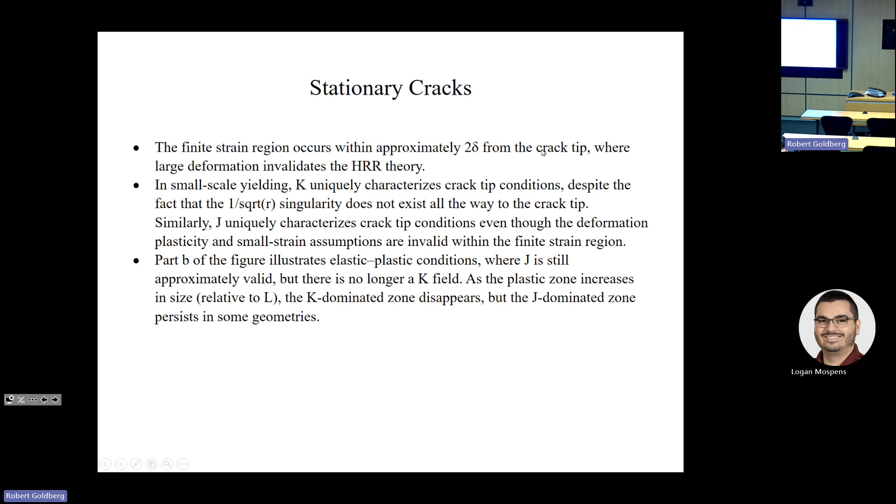In small scale yielding, K uniquely characterizes the crack tip conditions, even though the 1 over square root of R singularity doesn't exist all the way to the crack tip. And J uniquely characterizes the crack tip conditions, even though the deformation plasticity and small strain assumptions are invalid in the finite strain region, but this finite strain region is relatively small.

Now, the next step in this process, if we go to part B, this is a zone with elastic plastic conditions. There's no longer a zone that's subject to linear elastic fracture mechanics. In part A, we have this region where our slope's equal to -1/2, and everything grows nicely, and it's just about here where it starts to break.

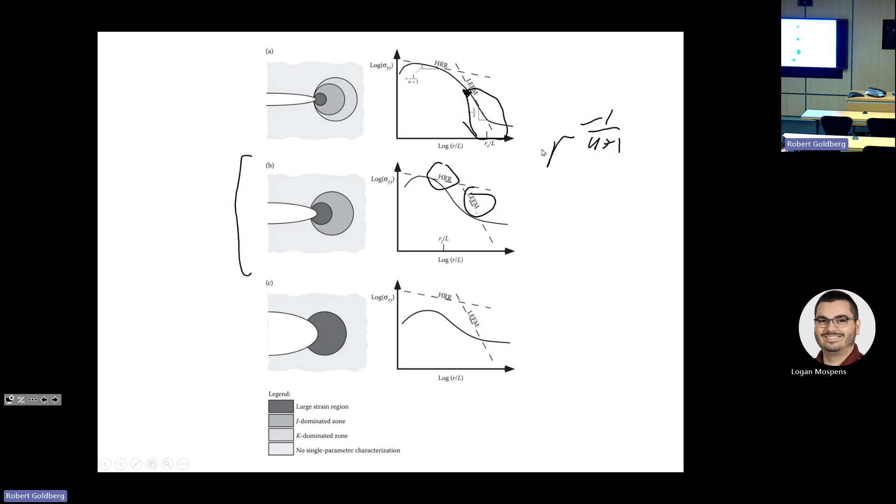We never have anything that fits within the parameters of linear elastic fracture mechanics, but the HRR conditions, the J conditions, are still approximately valid. So as the plastic zone increases in size, the K-dominated zone disappears, but the J-dominated zone persists.

Even though K doesn't have any meaning in this case, the J integral is still an appropriate fracture criterion. And since J implies CTOD, crack tip opening displacement is also still valid.

Now the final case, if you have lots and lots of plasticity, very large plastic strains, in this case neither K nor J are valid. The size of the finite strain zone is really, really large. There's no longer a region uniquely characterized by J, and single parameter fracture mechanics is invalid in this region, and any of your critical values exhibit a size and geometry dependence.

So what this means, why you have to be careful, is that in certain specimen and structural configurations and certain loading conditions, the K and J zones are very, very small, and a single parameter description is not possible except at very low loads.

It's important to emphasize that J dominance at the crack tip doesn't necessarily require the existence of an HRR singularity. All it requires is that the defining relations are valid in the process zones near the crack tip, where the microscopic events that lead to fracture occur. The HRR singularity is just one such solution.

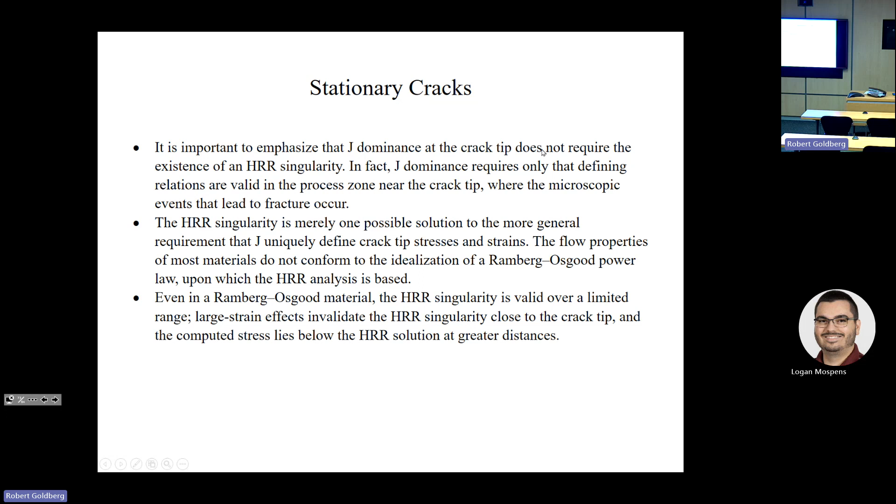So this effect, going back to the methods employed by Hutchinson, who defined the stress as an infinite series and showed that the leading term was proportional to the radius to the -1 over n plus 1. The singular term, as R gets closer to 0, dominates, and higher order terms are only significant for moderate values of R.

So when the computed stress field deviates from HRR, it still scales with J divided by sigma naught times R. So J dominance doesn't necessarily imply agreement with the HRR fields. And simple relationships also become invalid as your specimen boundaries interact with the crack tip.

We generally, when we derive all this stuff, assume that our cracks are just sitting in the middle of an infinite zone. So when edge effects start coming into play, it becomes a different ball game, and the linear elastic fracture mechanics solution also breaks down when the plastic zone size is a significant fraction of the in-plane dimensions.

As you start growing your plastic zone, the crack tip conditions evolve from plane strain to plane stress as the crack tip plastic zone size grows to a significant fraction of the thickness, and when the large strain region reaches a finite size relative to the in-plane dimensions, the J integral also breaks down. So all of these are just cautions to consider.

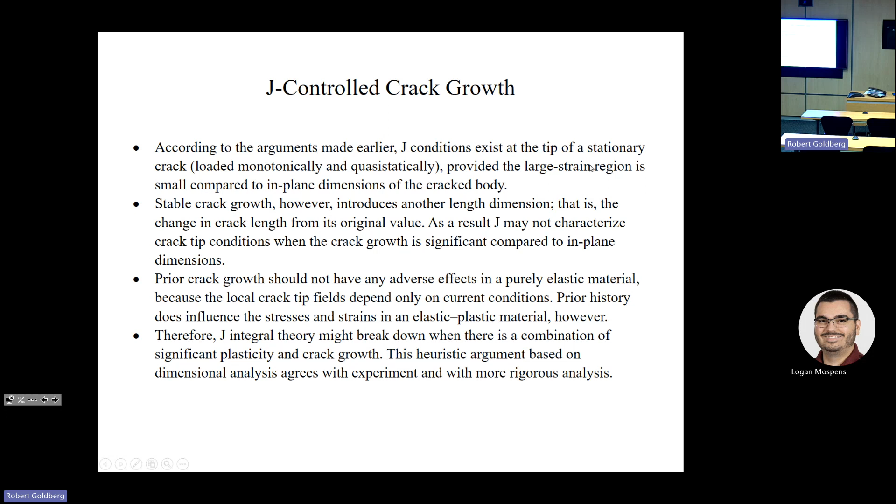But because in the case of plasticity, your plastic strains depend on how you get there, the strains and stresses in an elastic plastic material are influenced by the prior loading history. So when you have a combination of significant plasticity and crack growth, the J integral theory may break down, and we can look at it both from an analytical point of view—we're not going to go into it here—and from an experimental point of view.

Under J controlled conditions, we have a growing crack, and some of the material behind the growing crack tip is actually unloaded elastically.

Based on earlier discussions, we compared the unloading behavior of nonlinear elastic and elastic plastic materials. We talked about how, if you have a real stress strain curve, nonlinear elasticity assumes that you go back along the way you came. But if you have elastic unloading, that means you behave like plastic materials normally do, and you have permanent plastic strains in there.

This material in this elastic unloading regime, which acts like this, violates the assumptions of deformation plasticity, which all of our derivations were based on.

Some of this material directly in front of the crack tip also violates our assumptions because we have non-proportional loading, which means the stress components change at various rates and some components actually decrease.

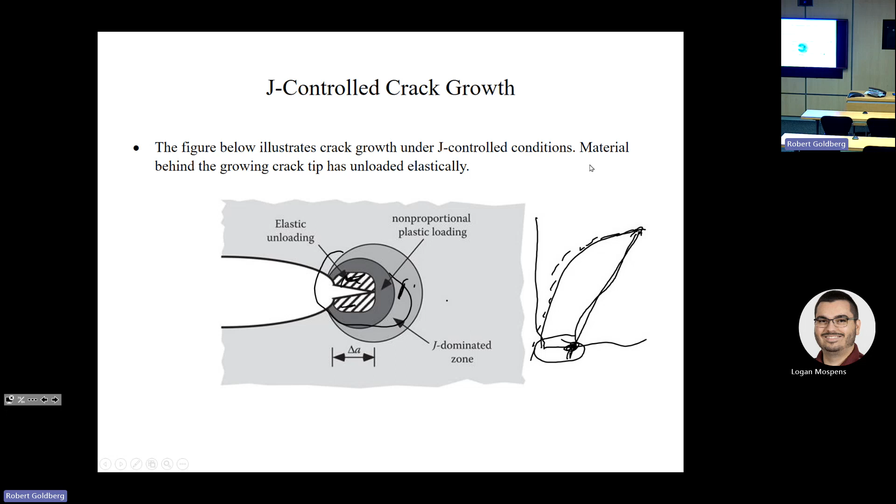And we can define our crack tip fields for stage one. We can say that our stress divided by our sigma naught term is equal to some function, valid for stage 1, of E prime times J divided by sigma naught squared R, and our angle theta.

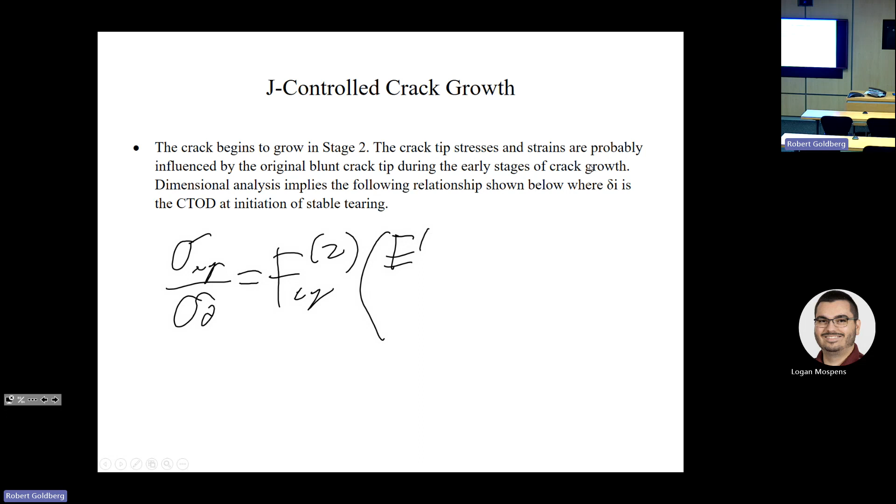The crack stresses and strains are influenced a little by the original crack tip behavior, by the early stages of crack growth. But we can say that at the start of stable tearing, our stress divided by our yield stress equals a function valid for region 2, which is a function of E prime J over sigma naught squared R and theta, but it's also now a function of our change in crack length divided by our crack tip opening displacement.

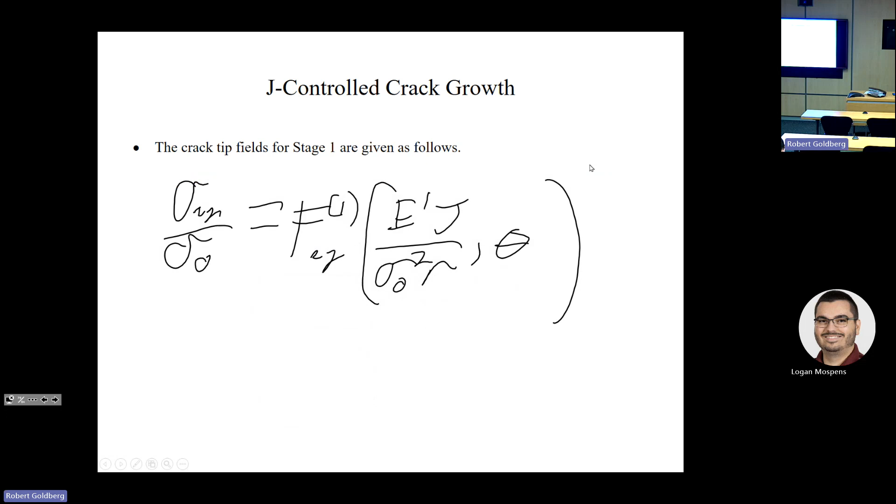Finally, we look at zone 3, where we have just steady state crack growth. So when the crack grows well beyond the initial blunted tip, we reach a steady state condition, and the local stresses and strains are independent of the amount of crack growth, because no matter how the crack continues to grow, our value of J just remains constant.

So in this zone 3, we have sigma ij over sigma 0 is equal to some function of E prime J over sigma naught squared R and theta.

So even though this equation and this equation would predict identical conditions in the elastic singularity zone, because of the history dependence, the material in the plastic zone of a tip of a growing crack is likely to experience a different loading history from material in the plastic zone of a blunting stationary crack. So these two functions are not equal as the radius goes to zero.

During steady state crack growth, a plastic zone of constant size sweeps through the material, leaving a plastic wake. The R curve is flat, J doesn't increase, as long as the material properties don't increase with position.

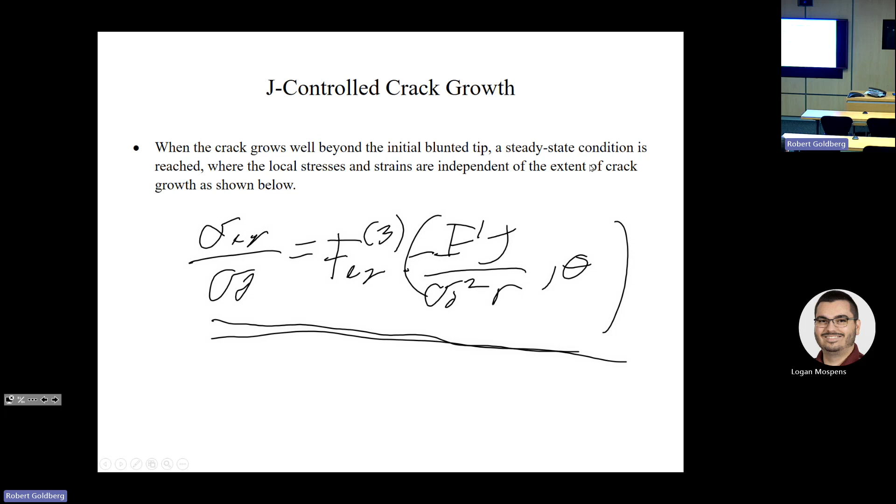So if this equation applies for the zone 3 response, J uniquely describes the crack tip conditions independent of crack extension. And if the material fails at some critical combination of stresses and strains, then the local failure at the crack tip must occur at a critical J value, just as in the stationary crack case.

And because our J curve is flat here, this critical J value remains constant with crack growth. If we had a rising or falling R curve, it would be due to the fact that the local material properties are varying with position.

So the second stage, a little more detail on this: it corresponds to the transition between the blunting of the stationary crack and the crack growth under steady state conditions. As you see here, a rising R curve is possible.

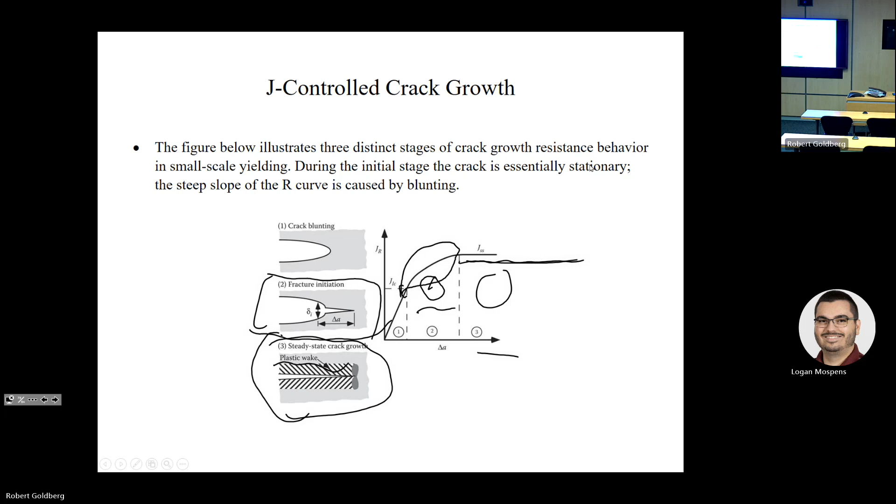So in this zone, we can have our R curve J as some function of our change in crack length, under small scale yielding conditions. So this JR curve can be considered a material property.

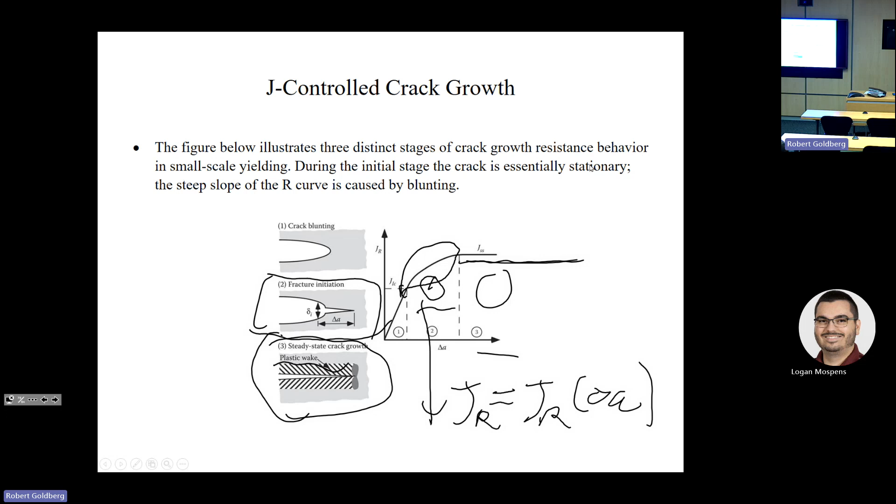During the blunting stage, the plastic zone expands during loading, but the crack doesn't extend by ductile tearing. Under steady state conditions, ductile tearing occurs, we get crack growth, but we have a constant plastic zone size. During the transition from blunting to steady state crack growth, ductile tearing and plastic zone expansion occur simultaneously, resulting in a rising R curve.

In laboratory tests, the steady state limit is usually not observed because in typical test specimens, the ligament is fully plastic during crack growth. Therefore, you don't have small scale yielding, which violates the assumptions. The crack also approaches the finite boundary while still in stage 2 growth. So you would need really big specimens to observe steady state crack growth in tough materials.

So that's what we have. This is our introduction to plastic fracture mechanics.

Okay, so as I said, next week we're going to start talking about how to go into more detail on all these things for linear elastic and plastic fracture mechanics. We're going to talk about how we measure some of these things in the laboratory.